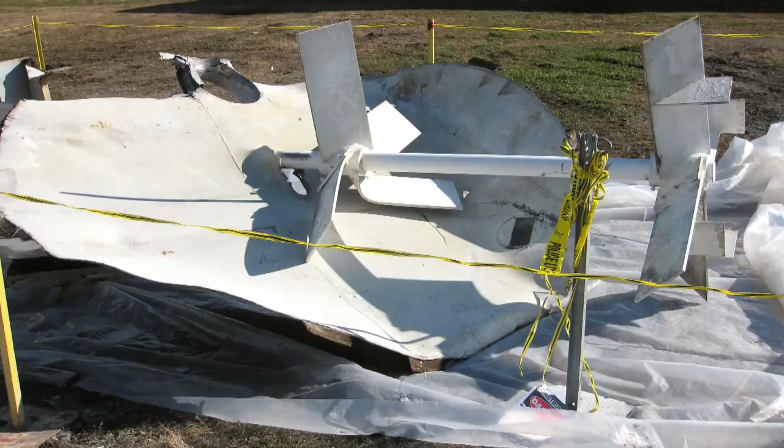On November 9, 2010, a powerful explosion shook the DuPont chemical manufacturing plant in Tonawanda, New York, a suburb of Buffalo. A contract welder was performing maintenance work on a tank that, unknown to him, contained flammable gas. The explosion blew the top off the tank, throwing the welder to the ground and killing him instantly. A second contract worker was burned.

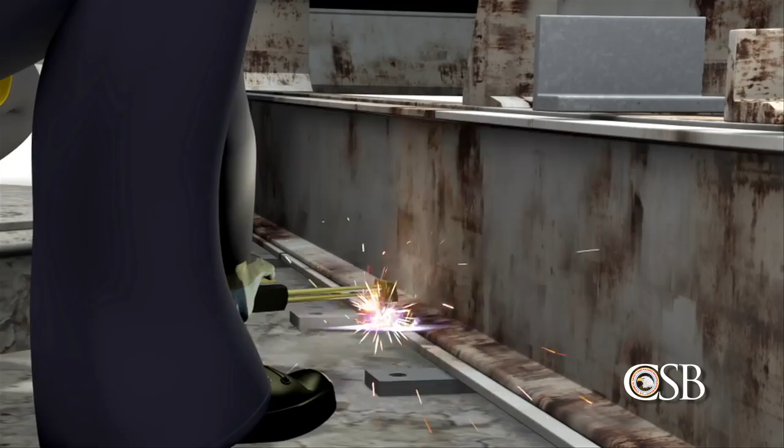The tragic explosion at the DuPont facility exposed weaknesses in how process hazards were analyzed and controlled. The result was the death of a welder in a preventable hot work accident. Hot work accidents occur when workers are welding, cutting, or grinding near flammable vapor, and were the focus of a 2010 CSB safety bulletin. Deficiencies in the safety management of hot work were among the causes of the tragedy at DuPont.

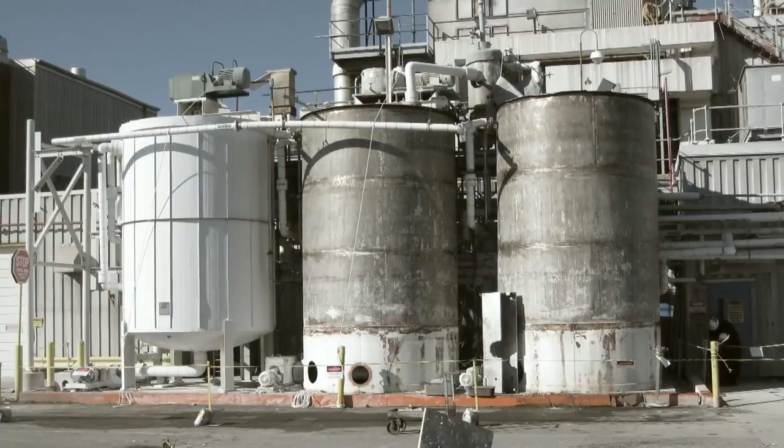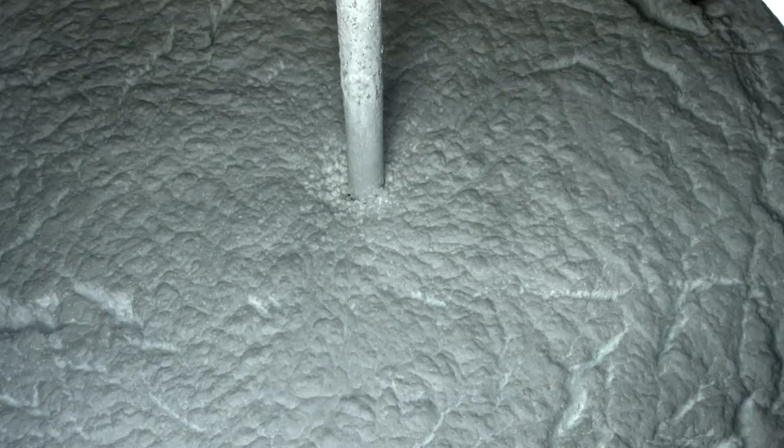DuPont's Tonawanda facility manufactures a polymer known as Tedlar, used in solar panels, and Corian for use in countertops. The process of producing Tedlar began with a chemical reaction to convert flammable vinyl fluoride gas into a slurry of polyvinyl fluoride polymer, or PVF, in water. The PVF slurry then passed through separators.

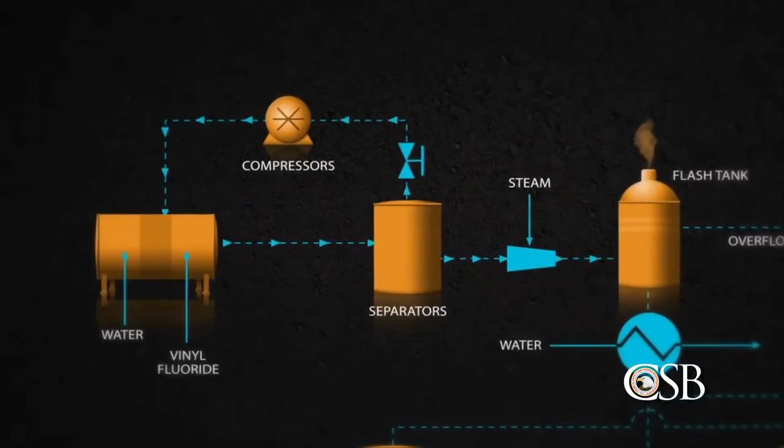Compressors recycled unreacted vinyl fluoride gas into the process, while a small flash tank released residual vinyl fluoride into the atmosphere. Finally, the slurry was transferred to one of 3 insulated holding tanks, usually tank number 3. Tanks 1 and 2 were reserved for slurry overflow. Tank 1 normally remained empty.

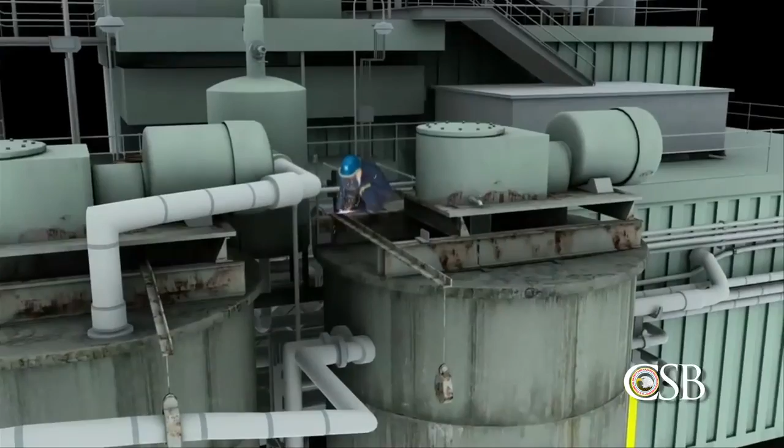On October 22, 2010, the Tedlar process underwent a planned shutdown, during which workers removed the asbestos insulation on tanks 1 and 2. Removing the insulation revealed that the agitator supports for the tanks were heavily corroded. DuPont directed contractors to repair the supports, which would involve welding and grinding on tanks 1 and 2.

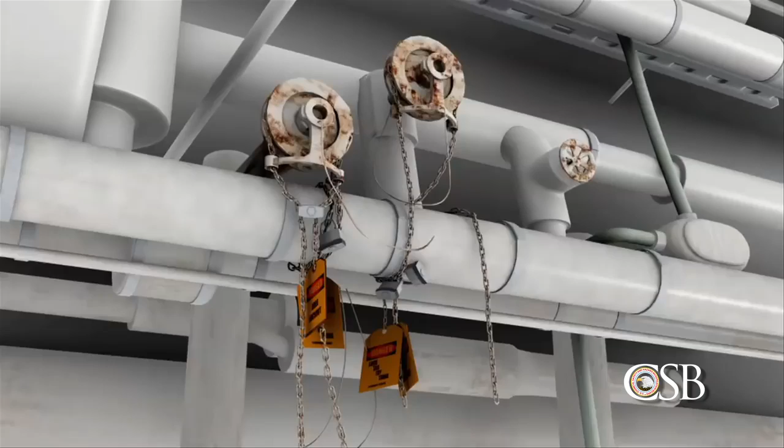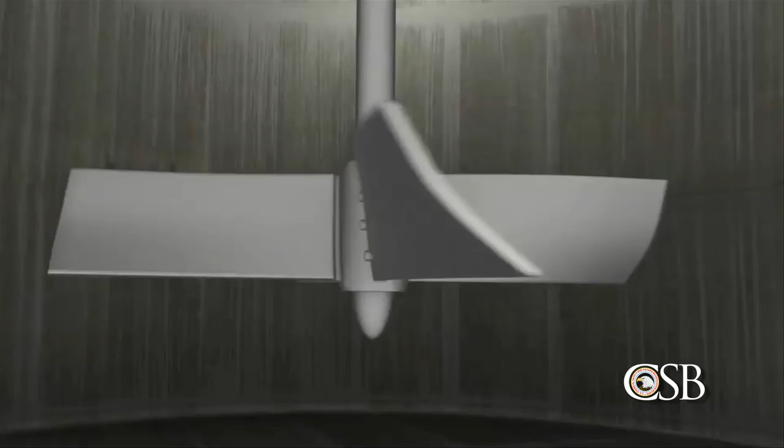The hot work on tank 2 occurred during the shutdown without incident, but the repairs on tank 1 were delayed while parts were ordered. DuPont personnel determined that it would be safe to perform hot work on tank 1 after the restart. On November 7th, DuPont operators locked all 5 valves leading to and from tank 1 in the closed position in order to stop potential slurry flow. The tank's agitator motor was also locked out.

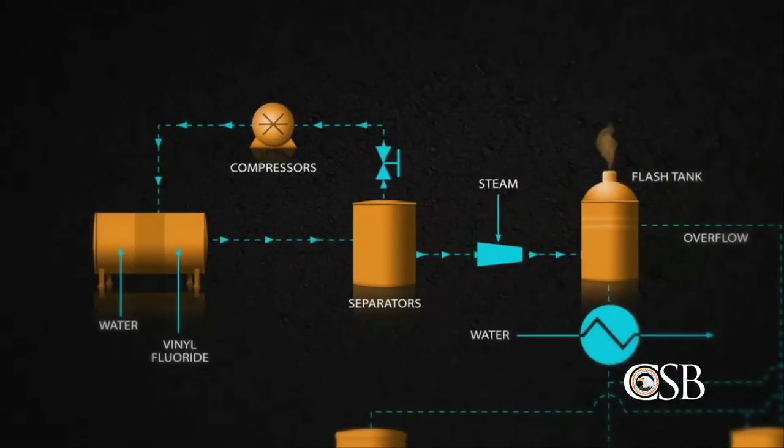However, DuPont personnel did not block the flow of gas inside the overhead piping, or overflow line, that connected the vapor space of all 3 tanks. They mistakenly believed that flammable vinyl fluoride gas could not reach any of the slurry tanks. But the CSB investigation found that even in normal operations, vinyl fluoride was not completely removed from the slurry and was always present in the slurry tanks in varying amounts. When the process restarted on November 8th, the flammable gas was able to travel from tanks 2 and 3 through the open overflow line into tank 1.

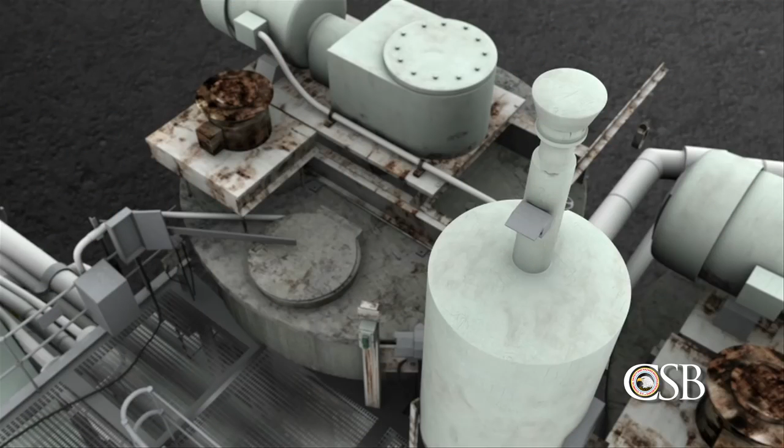On the morning of November 9th, a DuPont technician tested the atmosphere above tank 1, where welding would later take place. There were also 2 continuous air monitors in the vicinity. No flammable gas was detected, and the hot work was cleared to begin. But no testing was done to measure or monitor the atmosphere inside the tanks, where, unknown to the contractors, the flammable gas was at dangerous levels.

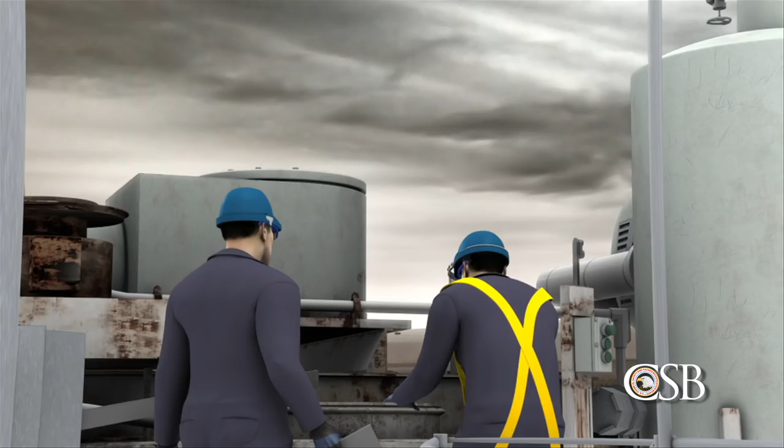Around 9 a.m., 2 contract workers began welding and grinding on tank 1. The welder connected his safety harness to the tank's agitator support and worked on top of the tank as the foreman looked on from the nearby catwalk.

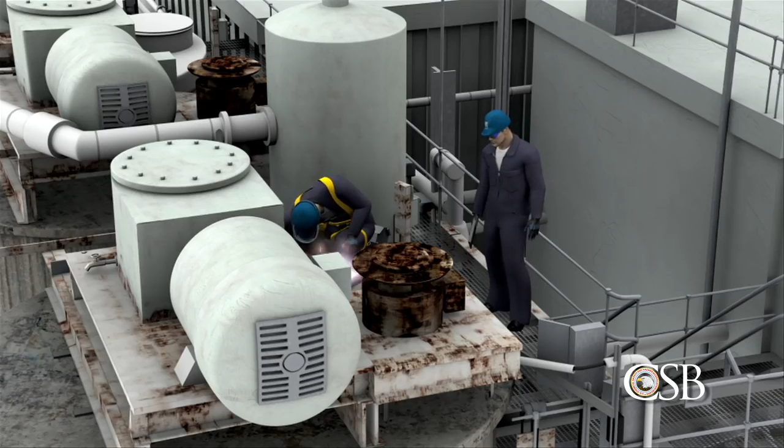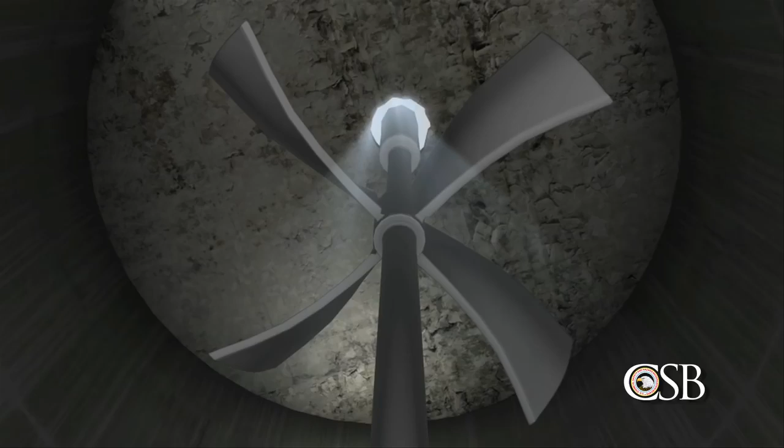At approximately 11 a.m., the welder was repairing corroded portions of the agitator support beams directly above the flammable gas. A hole around the agitator shaft may have provided a pathway for ignition. Welding sparks could fall into the tank, even as flammable gas might drift upward toward the sparks. The ignition of the vinyl fluoride caused a powerful explosion.

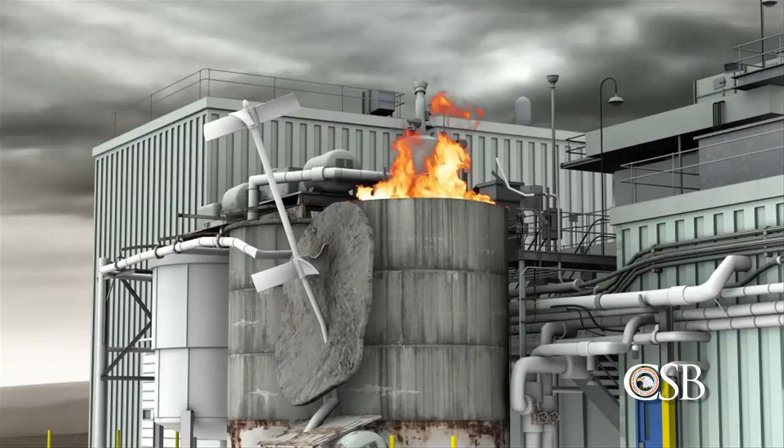The force of the blast blew the top of the tank almost completely off. A flash fire erupted that consumed the flammable gas and quickly burned out. The welder was thrown to the ground, killed instantly from blunt force trauma. The foreman's face and arms were burned.

Mark Wingard was a member of the CSB team that investigated the accident at DuPont. Had DuPont technicians tested Tank 1 for a flammable atmosphere, they would have known that any hot work presented a serious explosion hazard. But plant engineers did not realize that significant amounts of flammable gas could be present in the slurry tanks, and the testing was never done.

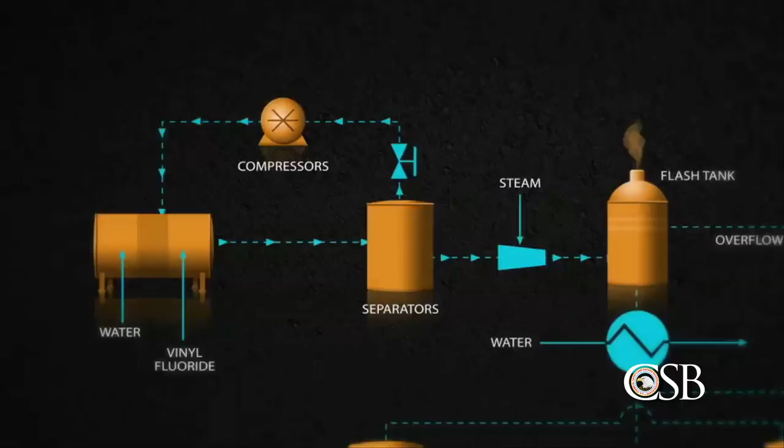DuPont regarded most of the Tedlar production process as covered under the OSHA Standard for Process Safety Management, or PSM, and therefore subject to stricter operating and maintenance requirements. But DuPont personnel did not include the slurry tanks in the facility's PSM program. In a 2009 process hazard analysis, DuPont erroneously concluded that flammable vinyl fluoride gas could never reach the tanks in dangerous quantities.

We found that the contractors did obtain hot work permits for welding on Tank 1, but those permits were authorized by DuPont employees who were unfamiliar with the specific hazards of the process, and the permits did not require testing the atmosphere inside the tanks.

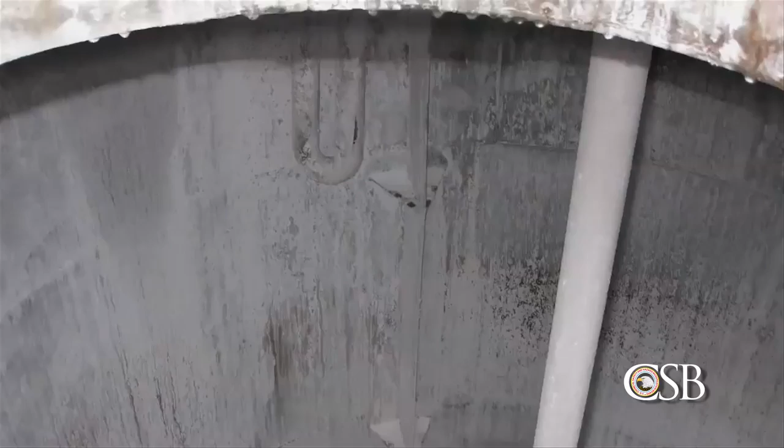Two additional factors may have contributed to the tragedy. Prior to the explosion, DuPont personnel had discovered that slurry tank number 2 had a hole in a liquid trap, which was designed to prevent the flow of gas from the flash tank. Without a liquid seal in the trap, there was an additional pathway for vinyl fluoride gas to flow into the tanks. However, this hazard went unrecognized, and DuPont engineers concluded that it would be safe to return the tank to service. No formal management of change review was conducted.

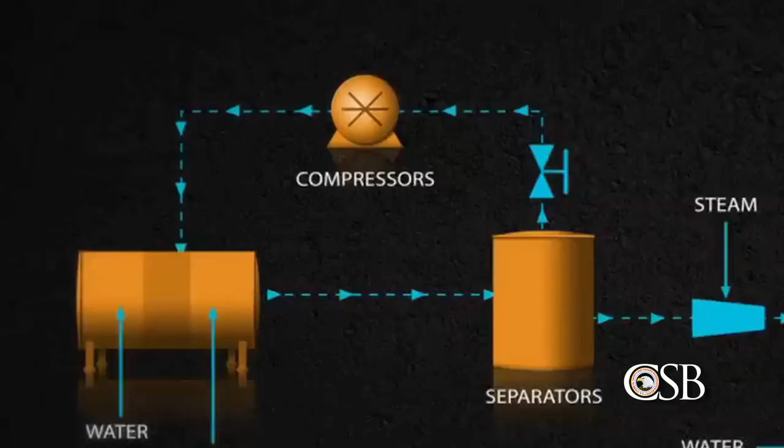Further adding to the danger, on November 8th, there was a malfunction in a compressor used to strip vinyl fluoride gas from the PVF slurry. As a result, the slurry contained more than the normal amount of vinyl fluoride. Once again, DuPont personnel did not formally analyze the safety impact of continuing to operate with a malfunctioning compressor.

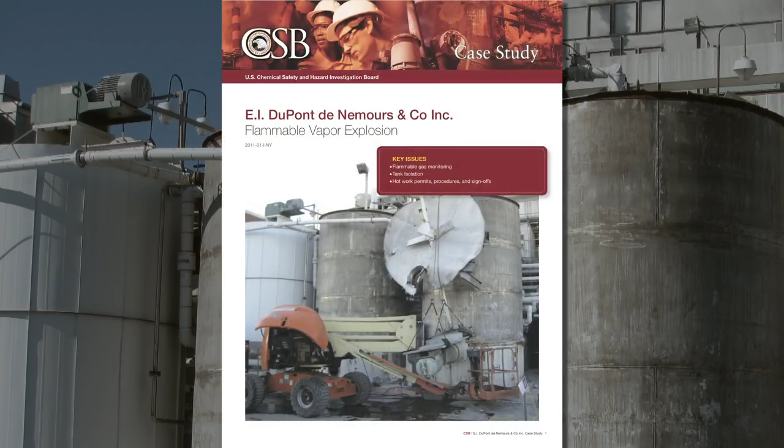In its final report, the CSB recommended that DuPont revise its corporate policies to require atmospheric monitoring inside tanks before and during any hot work. And the board recommended that DuPont require all process piping, including vent lines on tanks, to be positively isolated before authorizing any hot work.

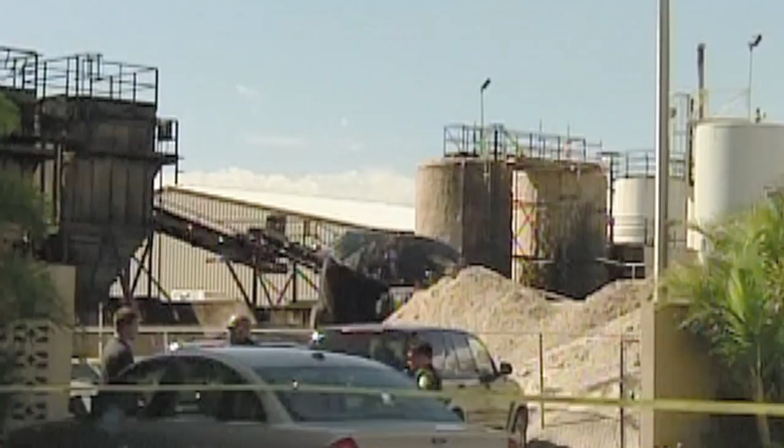In our 2010 Hot Work Bulletin, the CSB identified 11 accidents similar to the one at DuPont. All involved hot work on tanks that ignited flammable gas inside. In all cases, the CSB found that there was not an adequate system in place for monitoring the atmosphere for flammable vapor where hot work was to occur.

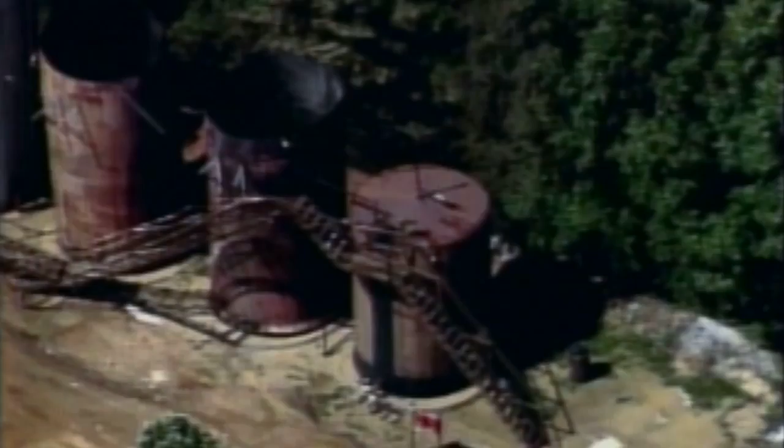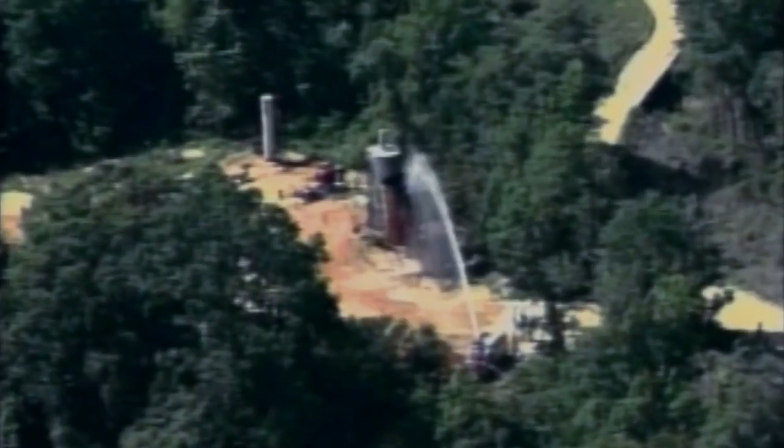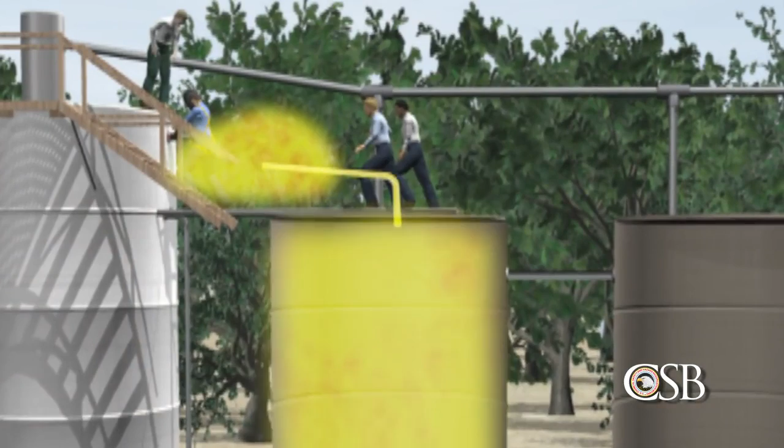For example, in June 2006, 3 contractors were killed and another seriously injured in an explosion at the Partridge Raleigh oil field in Raleigh, Mississippi. The contractors were welding on one of 4 storage tanks when welding sparks ignited flammable vapor flowing from an adjacent tank. As was the case at DuPont, no monitoring was performed to test for flammable gas inside the tank, and piping to the adjacent tank was not isolated.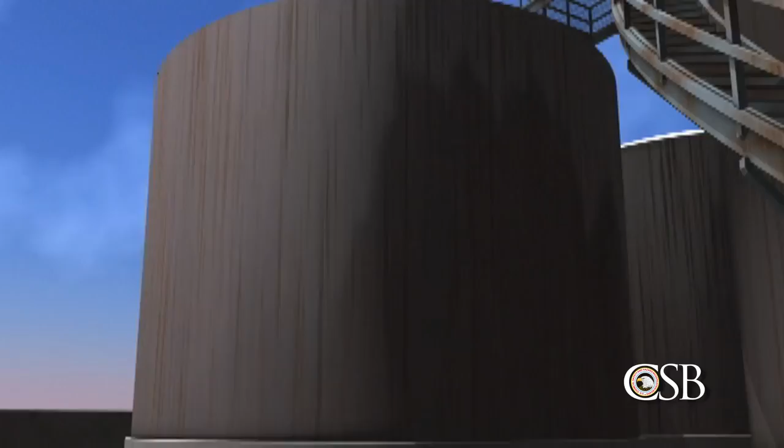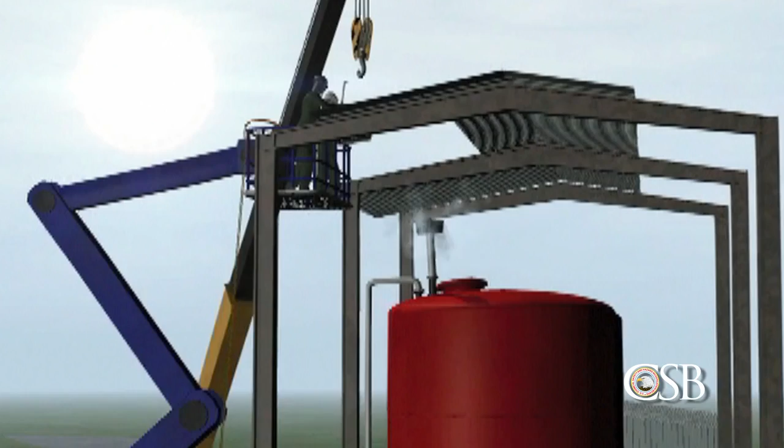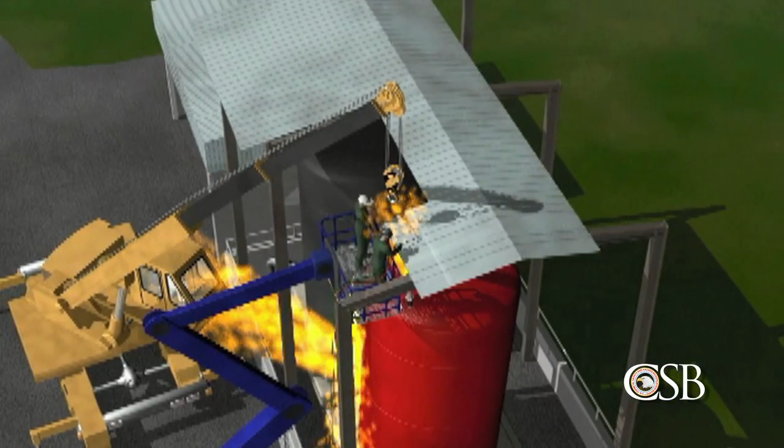In July 2001, an explosion killed 1 contract worker and injured 8 others when welding sparks ignited flammable hydrocarbon vapors in a large sulfuric acid storage tank at Motiva's Delaware City refinery. And in January 2006, 2 workers died and another was seriously injured in an explosion at a municipal wastewater plant in Florida when hot work ignited vapor inside a storage tank of highly flammable methanol. In all of these cases, combustible gas monitoring either was inadequate or wasn't performed at all.

In its 2010 safety bulletin, the CSB said companies can prevent hot work accidents by analyzing the hazards, enforcing rigorous training and permitting procedures, constantly monitoring the atmosphere for flammables, and avoiding hot work in favor of non-spark producing methods whenever possible. Hot work is often seen as a routine activity, but it can prove deadly if fire and explosion hazards are overlooked.